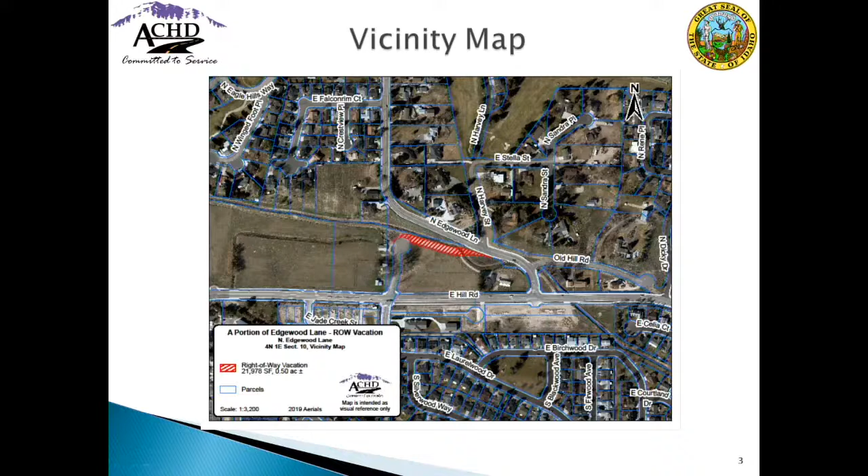This is a close-up view of the vacation. The vacation goes to the circle, which ACHD determined to be the terminus of Edgewood Lane at the time. It also contains, as you can see, a canal here, and some of this vacation includes property encumbered by the canal.

The appraised value of the vacation, excuse me, is $49,511.25. It is staff recommendation that the Commission adopt Resolution 2340 as submitted and vacate the property. I will remain standing for any questions.

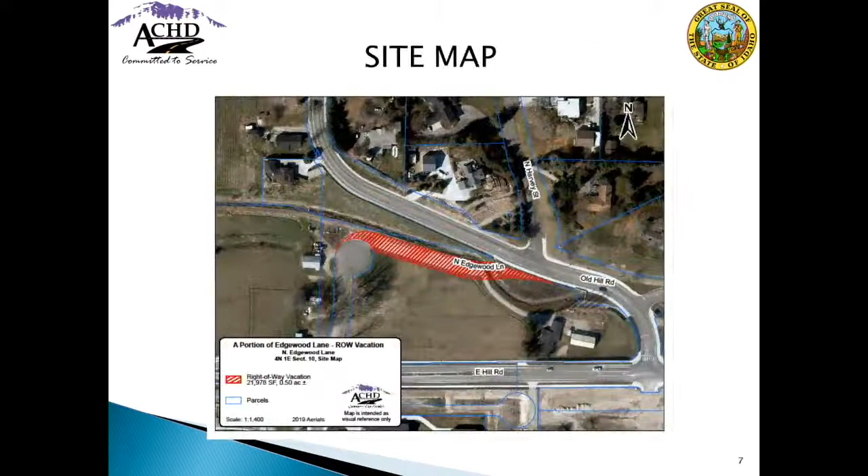Are there any questions of Mr. Serdar by the Commission? Mr. President, yes, just one quick question. The comment was made that the property was retained initially due to access required for the property that's there at the corner of Hill Road and Old Hill Road, I guess. The access issue, that's no longer an issue after the realignment of the road? Is that what we're dealing with? President Goldthorpe, Commissioner.

What the issue was at the time is we couldn't force them to take the property at the time and make them offset the cost of the property. Okay, so the people that are doing it now are the subsequent owners to the property. Okay, so access, after the realignment of surrounding roads, there were no access issues. It was simply a matter of this property being left over, the owner could buy it or not as they chose, and that's where we are. That is correct. Okay, thank you.

All right, are there any other questions? Any comments? Then this is a public hearing, and so we will now open the public hearing. Stacy, do you have anyone who is signed on to address us today? We do not have anybody signed up to testify. In that case, I'll just close the public hearing and put the matter in front of the commission for a motion.

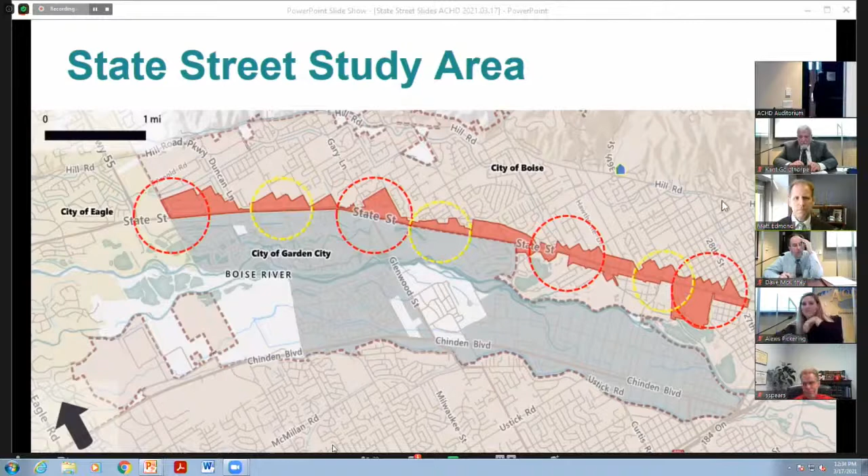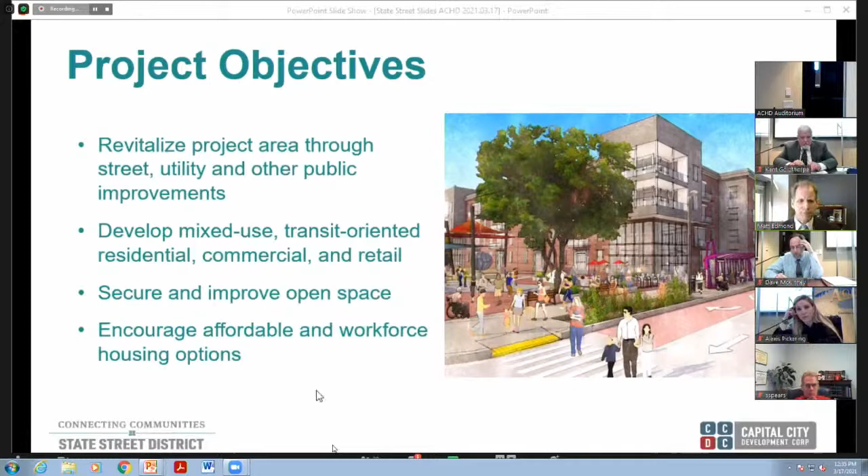So as part of our urban renewal planning effort, we commissioned SB Friedman to conduct a market assessment for the State Street study area. They determined that there's sufficient demand in the study area that, with urban renewal assistance, we would see this level of development in the next 20 years over the term of a 20-year urban renewal district: roughly 4,000 new residential units, either single family or multifamily attached, 50,000 square feet of office, and 362,000 square feet of retail, possibly a hotel.

So the role of CCDC in this: as Boise's urban renewal agency, CCDC employs 5 strategies to foster development, either through our own projects, through partnerships with other public agencies like ACHD, or public-private partnerships. These strategies are infrastructure, mobility—probably the two most germane to the highway district—as well as economic development, placemaking, and special projects.

First, on these strategies, I want to touch on infrastructure. The biggest one with regard to the highway district would be new streets, either perpendicular to or parallel to State Street. We seek to build these in coordination with development and approval of ACHD. The hope would be these streets improve access and circulation, create low-stress routes for walking and biking, and allow for improved access management on State Street, since it's a high-volume, high-speed corridor—the fewer direct access points, the better.

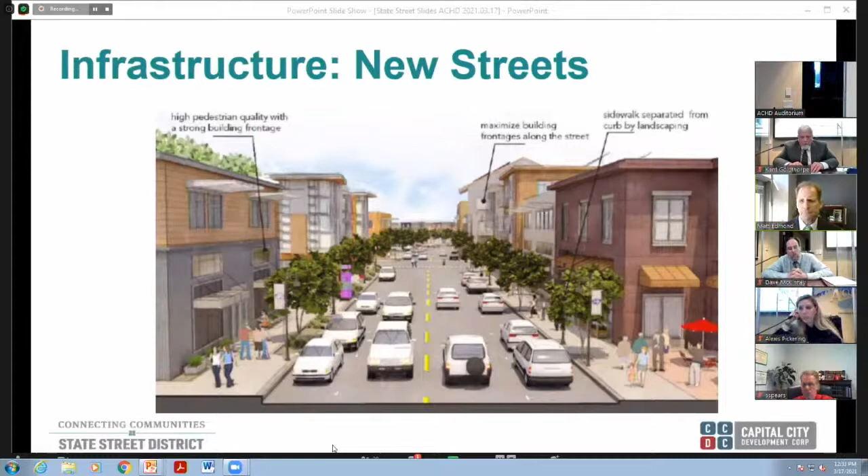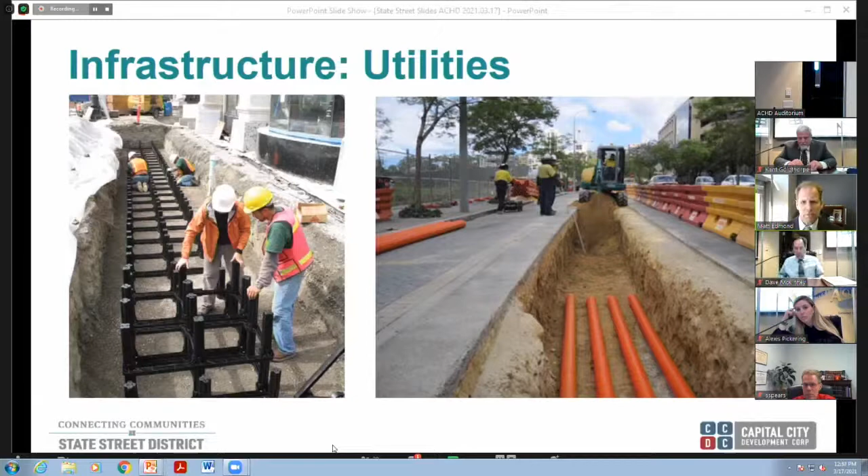Next, with regard to infrastructure, utilities. These are some of the things we've been involved in. On the left, you can see Silva cells, a type of green stormwater infrastructure. They help healthy tree root growth but can also be used for stormwater capture and treatment—we have them in a number of our streetscapes downtown. On the right, conduit banks, which we've started doing in concert with the city of Boise. If we can get spare conduit down major corridors, when a new telecom comes in, rather than digging a new trench and cutting into pavement that's possibly fairly new, the city, which has a master license agreement with ACHD, can just license that telecom to go into existing conduit. So it reduces the need for pavement cuts and hopefully improves broadband internet access and cost.

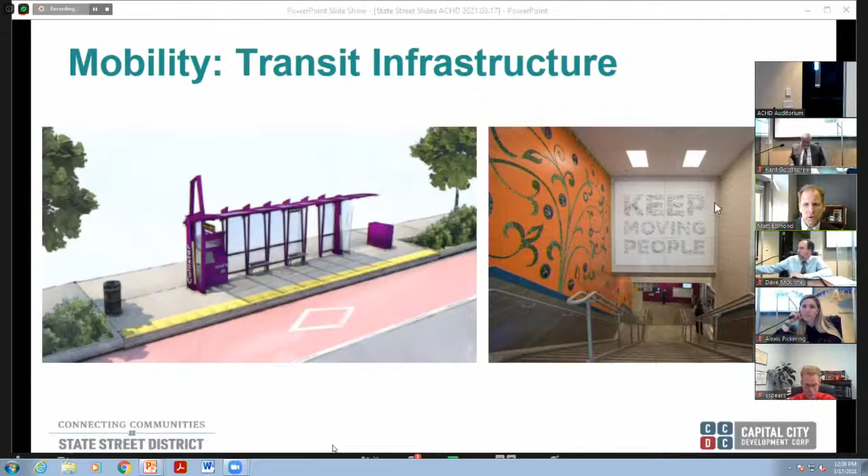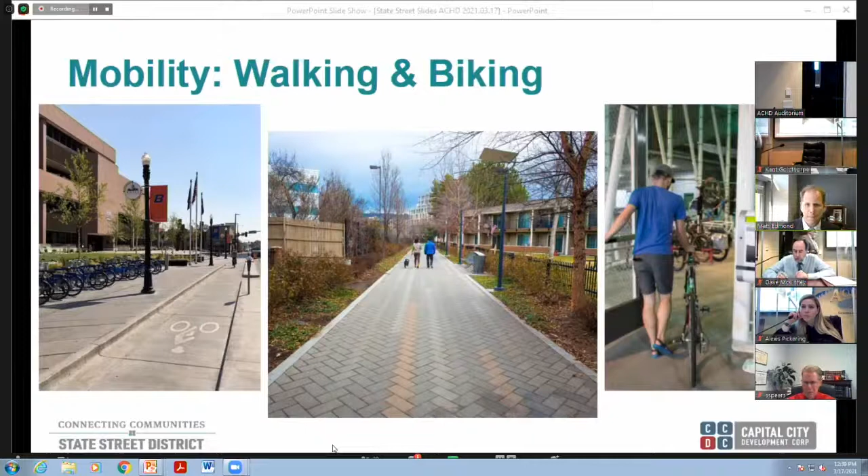And lastly, near and dear to my heart, parking. This may or may not include one or more parking structures along the corridor, depending on what we determine with our consultants.

I'll touch on the last three strategies real quick. Economic development: we generally pursue cultivating commerce and growing resilient, diversified local economies. We try to include components of affordable and mixed-use housing with these, and we can often foster development of properties that would not otherwise redevelop due to odd geometries, site contamination, or other challenges. You can see the Ash Street townhomes here on the left—that was a fairly odd-shaped parcel—and then the Water Cooler at 14th and Idaho, along with CCDC restaurant, on the right.

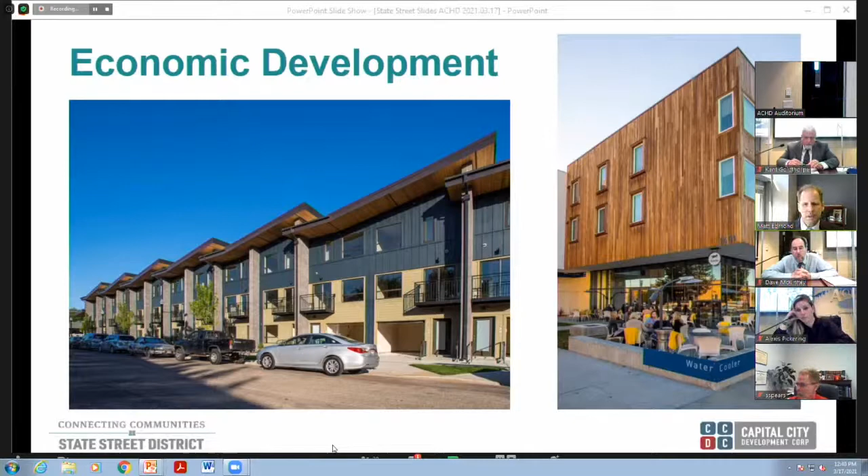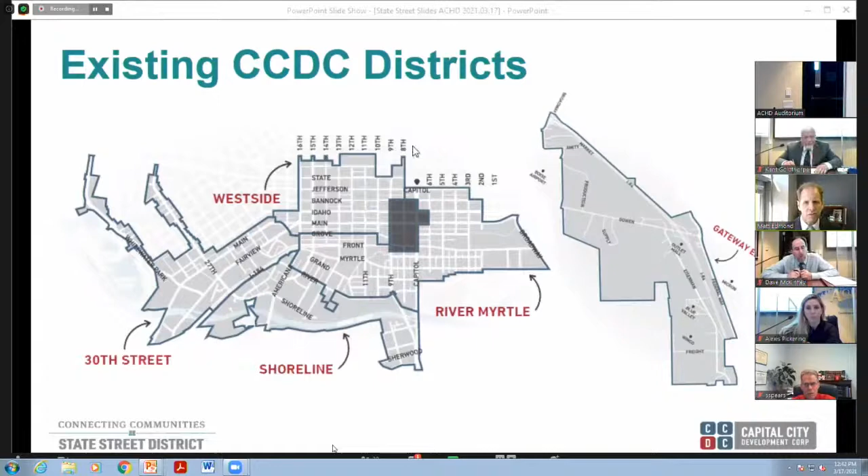So, process and next steps. This is what we've done to date and what comes next. We're currently developing frameworks and public improvement lists, and cost estimates to go with those lists, for a draft corridor framework.

Once we have a project list firmed up, including transportation elements, we'll reach out to ACHD staff to discuss a possible interagency agreement. In May and June, we'll seek input on the draft corridor framework, and we hope to have the fundamentals of any interagency agreement established, including that with ACHD.

We plan to take this to the CCDC board, currently at the July board meeting. Should they elect to approve it, we'll transmit it to the taxing districts, including a separate transmittal to ACHD for comment. If all goes according to schedule, the urban renewal plan would likely go before City Council for a public hearing in October.

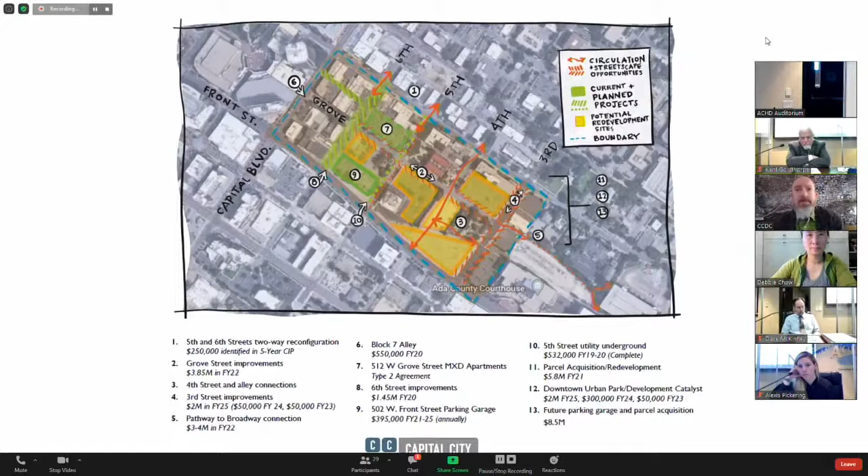Okay, so we're here to discuss one specific project that the vision report identified as a priority for public space and infrastructure investment, and that priority is the streetscape improvements on Grove from 3rd to 6th Street. This project helps accomplish the community's vision for the area by creating a distinctive shared street that will help celebrate the historic culture of the area, focus on multimodal transportation, explore sustainable strategies, and provide a venue for community events.

The project also takes into account interfacing with the multi-use pathway that would connect 3rd Street to Broadway, as well as a couple other ideas contained within the vision report and CCDC CIP. Other components of the project are utility infrastructure upgrades, green and stormwater infrastructure, inclusion of public art, and a distinctive Boise City Canal design feature.

ACHD staff are part of the stakeholder group, and CCDC will be re-engaging the stakeholder group at the end of March. Today, we're wanting to discuss what are the appropriate options for bicycle facilities so that we're communicating those options appropriately as we re-engage the stakeholder group and the public. And Debbie, I'll let you go ahead and hop into the bicycle facilities.

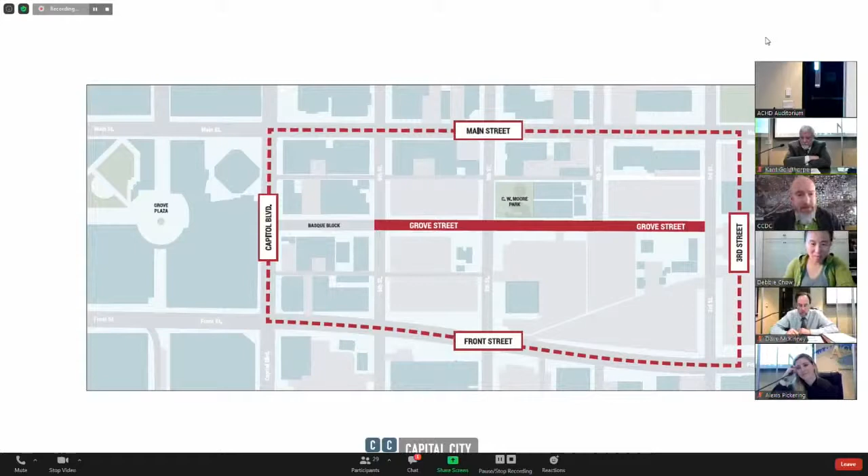Good afternoon, commissioners. I wanted to thank you for the opportunity today to talk about Grove Street between 3rd and 6th Street. And I wanted to show you a couple slides that show us what there is today and confirm some of our assumptions and how we move forward to design Grove Street between 3rd and 6th, and what's the role for Grove Street. Before you is the bike map, today's bike map from ACHD's website.

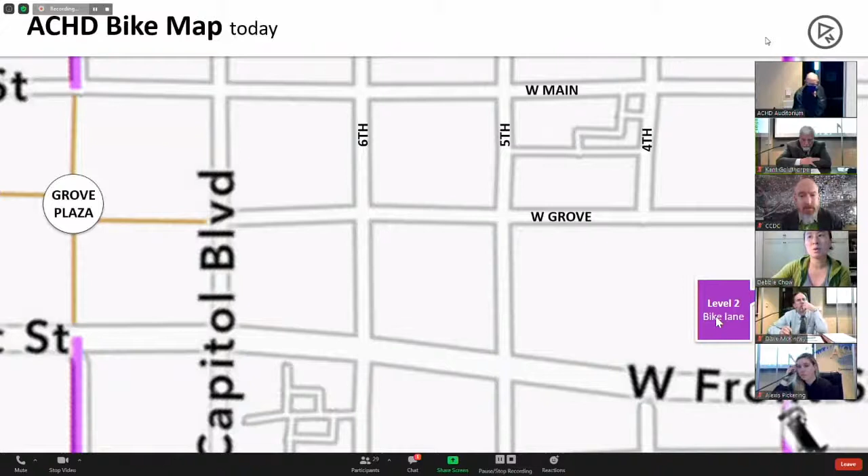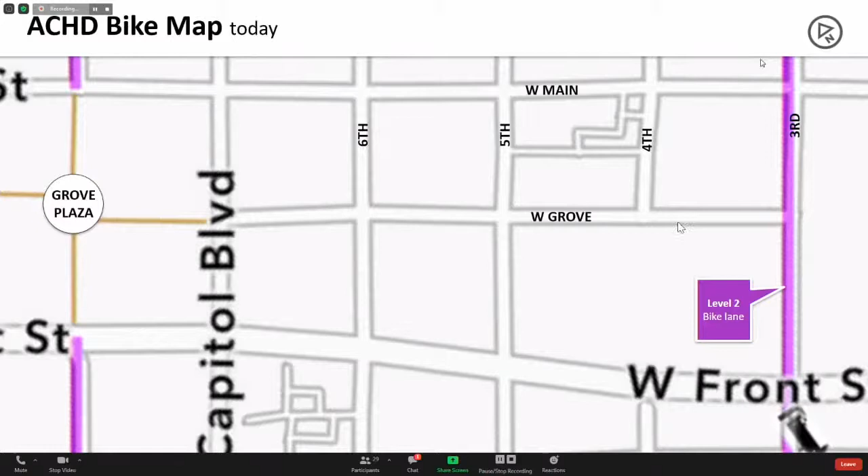What it shows is Grove Street is right in the middle. We have some purple bike lanes showing on 3rd Street right now, as well as on 8th Street. But there are no other current bike facilities in this area today.

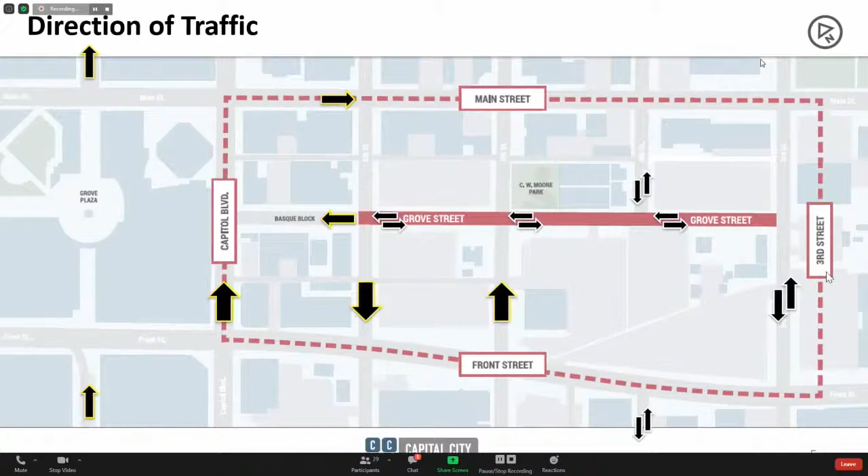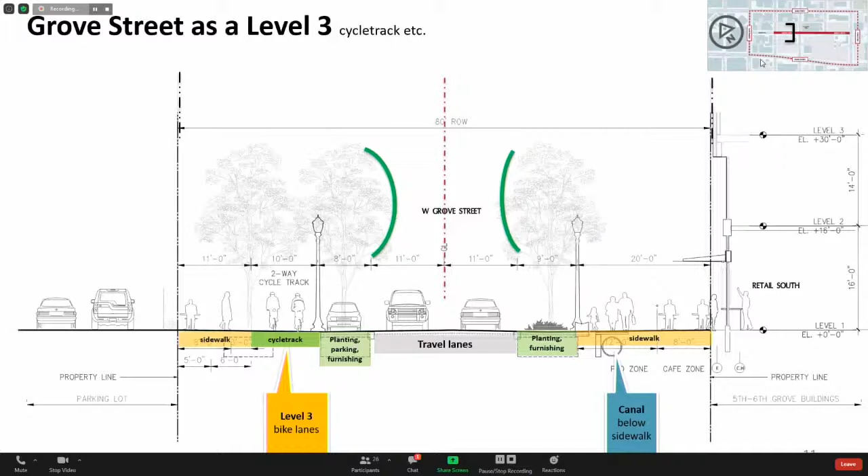And of course, looking at the first block, actually this block right here, where the Basque block currently resides. This is a one-way street, and we wanted to capture the current condition at the sidewalk level, but also on the north side, and also on the south side, but understand how Grove Street from 3rd to 6th will connect with the Basque block, and then come to the Grove Plaza if you keep heading towards the Grove Plaza.

Do you have any questions?

Yes, I have one. Is Grove Street a collector or arterial? Just as a pop quiz.

I'm curious because all I see is slow traffic on Grove. And so I think there's ways with traffic calming and other things to make Sharrows work really well if you wanted to go that way. I think it's a lovely area, and you're going to be able to definitely make it more of a place-making project than it even is now. So I'm interested in seeing how this moves forward.

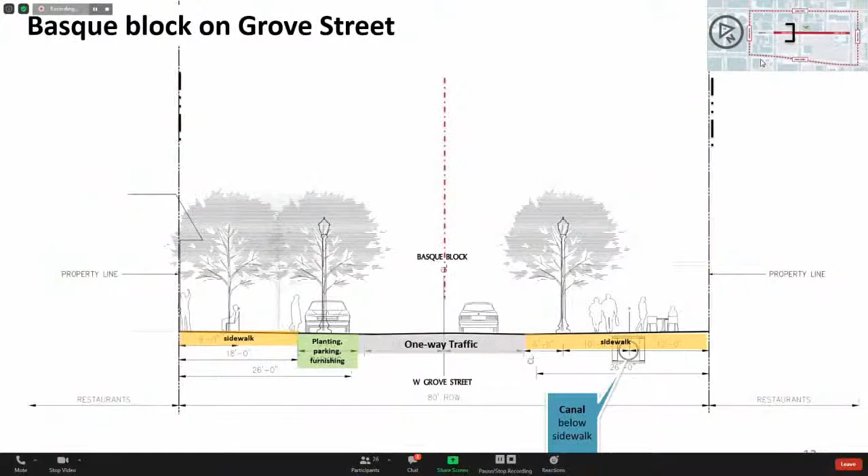Jack, do you want to? Okay, go ahead. Debbie, so you showed us on one end the Basque block. Can you show me again what Grove connects to on the other side, going east? And what those facilities look like?

So Grove Street on 6th, and right here is the Grove Plaza, Basque. So between 5th and 6th, between 4th and 5th, and 3rd and 4th. This is where the Department of Labor building is located. This is the Department of Labor Annex. There is a canal easement located right here. And Carl, can you speak a bit on this piece of easement?

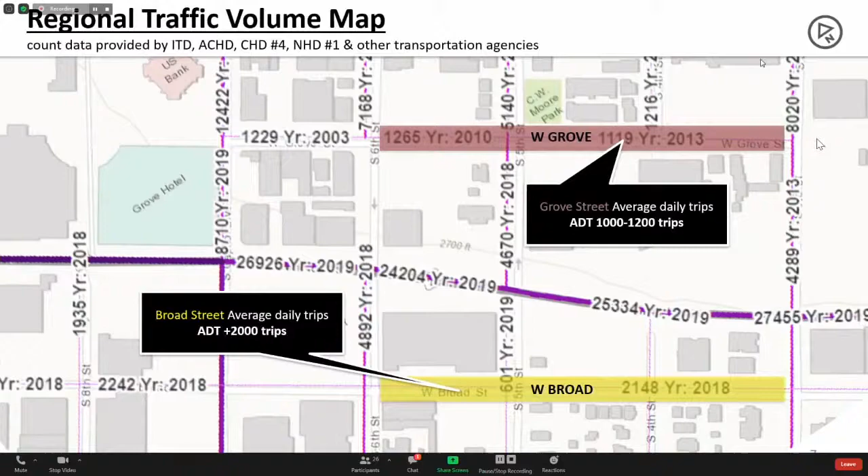So that's going north and south, and on the furthest east is 3rd Street, is that correct? Yes, this is 3rd Street. And 3rd, because I know they have great bulb outs and a few other pieces, do they have a Sharrow, or do they have other bike facilities?

Currently, there is a Sharrow from Google Maps that I can tell. But in the long run, from this ACHD addendum, it looks like north of Main Street on 3rd, this will remain as a Sharrow, and then south of Main, it's going to be a bike lane facility.

This is part of the reason why we wanted to come here and speak with you, is to confirm that between 2018 and now, 2021 - sorry, 2018, I'm traveling back in time - has any plan changed, or are the thoughts still the same?

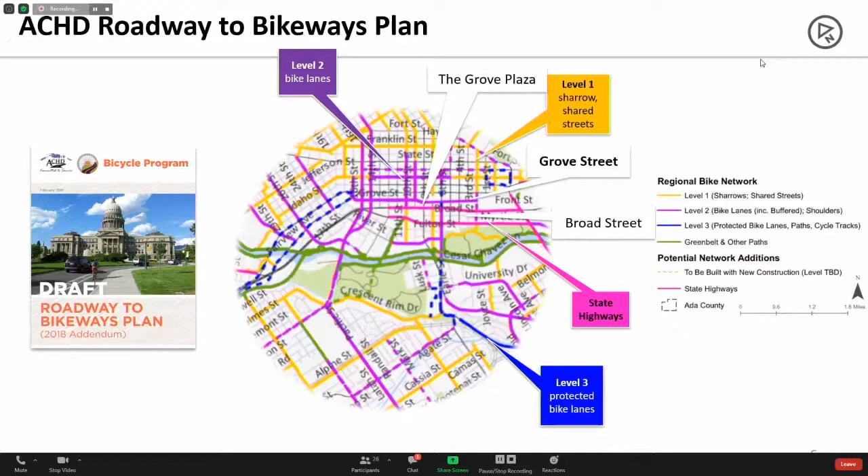And I want to show you a couple more, probably this is more brainy and more nerdy analysis here. We did a pretty in-depth analysis on the three types: there's the level 1 shared street, the level 2 bike lanes, and the level 3 two-way cycle track.

So what we did is take this 80-foot street and slice and dice many different configurations. Here's the center line of the street. The first one is what we saw: if we have an 11-foot lane, we have parking on either side, a 6-foot tree planting zone, and a 15-foot sidewalk. In every single one of them, you can see we have a consistency of where the canal is located, and that's one special feature we have, and we've heard from the community that's something they want to highlight, as well as the history component, for Grove Street.

So what we did here is flesh out all the possible scenarios. What we really want to get to is not a 9-foot sidewalk, but a much wider sidewalk space. But where there are areas where we can share the modes, we would. We wanted to come here to discuss with you what is the most appropriate way of sharing modes, and what's acceptable for ACHD, for the future of this segment of Grove Street between 3rd and 6th, connecting to the Basque Block and also to the Grove Plaza.

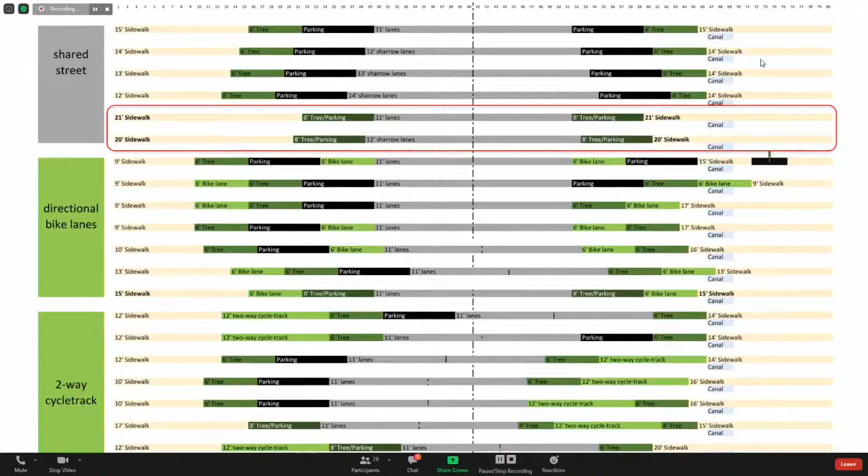Carl, do you have something to- Carl, before you respond, I'm getting a little bit confused. If you're here today to ask us for direction, we have people for that. The commission doesn't give direction for designs and stuff from the dais and work sessions. We just don't - we're not qualified, and a number of other reasons. If you'd like this street to look like 8th Street, then that's probably, after the designs are done and reasoning done and the city's behind it and CCDC, then you should probably come to us then.

But otherwise, this is all looking really great, but we're not professionals. Is that about right, Justin? Commissioner Goldthorpe, members of the commission, thank you. Justin Lucas, I'm the Deputy Director of Planning and Project Management here at the Highway District, just for the record. I think you hit it right on the head, Commissioner Goldthorpe.

We're glad to coordinate with CCDC on the options for this street. It is a local roadway. I think there's all kinds of options that can and should be considered, and typically, historically, on this type of roadway in a downtown setting, the Commission has worked with the Land Use Agency or the Urban Renewal Agency to find the best fit for the community. So I think looking at all these options today, there's lots of interest.

This map shows the Ustick maintenance site location. The property is this area right here in blue. As you can see, it's on the north side of Ustick and west of Ten Mile. Just to the north of us is the wastewater treatment plant. The land we acquired is vacant farm ground, essentially a blank canvas for us to use. In the southeast corner, there's a house on the facility, and as we're doing the site prep and building up the site, that will act as our temporary admin building.

Jennifer? Yes, ma'am. Is that the City of Meridian's wastewater treatment plant facility - is that what that is? Okay. Yes, it's Meridian. Okay, thank you.

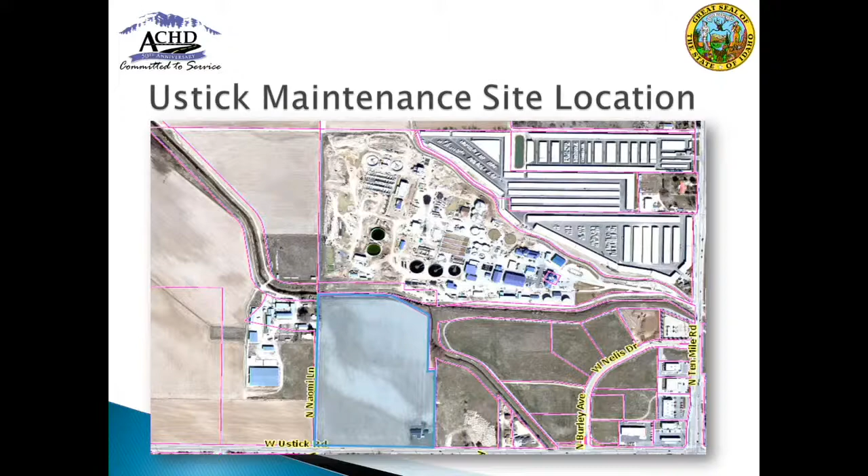By the way, there are trout in the creek at the north side of our property. Sweet, love that.

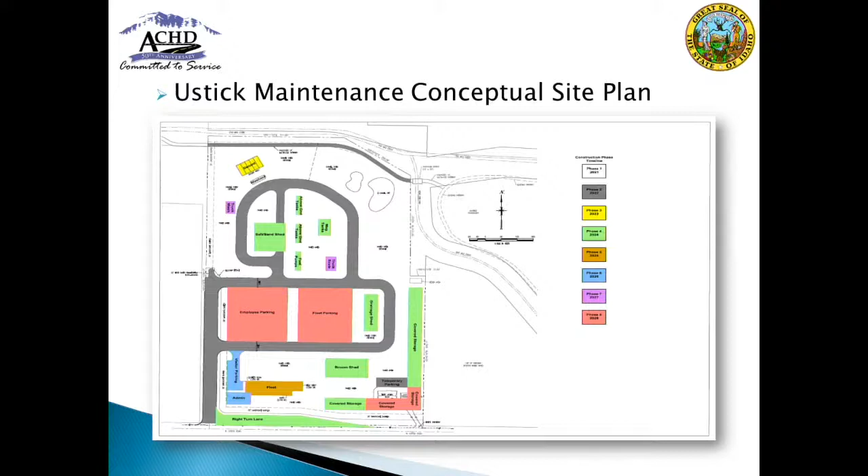So this is just an overview slide to show the conceptual site plan. This will be our proposed end state. I'm showing it to you all in one image here, and then I'll step through it in the next several slides. We phased it out. The colors represent each year of the development with a goal in mind for each of those years. This site plan is going to be submitted to the City of Meridian to start the rezoning and annexation process.

So the first phase is where we are right now, FY21. The goal in this phase is obviously annexation into the City of Meridian and rezoning for our uses. It's currently residential. We're in this part of the phase right now. Once that annexation and rezoning occurs, depending on where we end up this year, the plan is to get all that accomplished by this summer, then we can start connecting to city services and begin the design process, bringing on an architectural firm to start building this out based on our concept.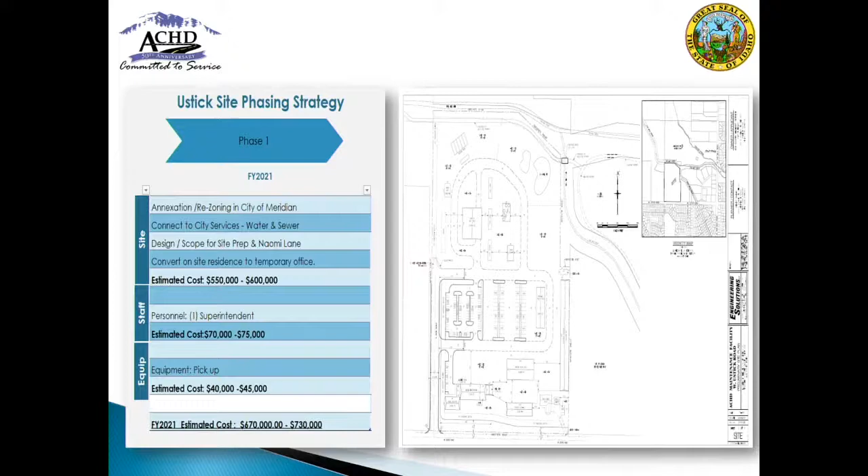I do want to take a moment on this slide. The very first goal we had in this phase was to bring on our superintendent of the Ustick Yard, so I'd like to formally introduce Heather Tillett, who's here. She is the superintendent of the yard. She's been instrumental in putting all of this information together. She's been doing a lot of research on decant facilities and what it's going to take to rezone. She's been working with our planner. So a lot of work since we brought her on in October, and her job is only just beginning.

So phase 2, this is when we're going to do the bulk of the site prep. The areas on the map highlighted in gray—primarily there's a road right now that connects to Ustick, that's Naomi Lane. It's a private lane right now, so we'll be moving that lane over to realign with the south portion of Naomi, widening it out a little, and building that site access road throughout the site. We'll also throw in a little temporary parking at the house. As I mentioned, that's where the admin building is going to be—a temporary operation until we build the final new admin building.

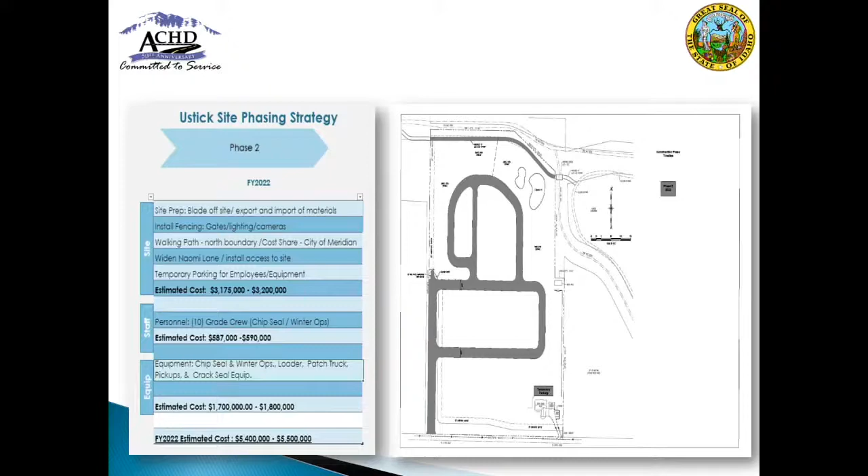I do want to make note on this slide of the cost of equipment. As we've been phasing all the equipment out, we're looking at the equipment we have now—equipment that would ordinarily be going to auction this year—and holding some of it back a little longer so we can phase it out over time. We're keeping equipment a bit longer so we're not seeing such a big push of new equipment as we're bringing on these new operations. We're really trying to balance that out to best use the taxpayer money.

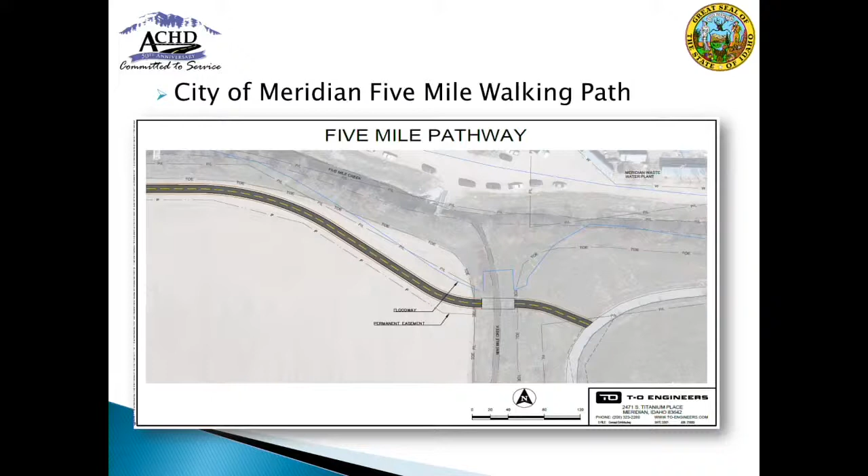Also in this phase, I want to point out that on the north end of the property, there will be a pathway put in. This is in concert with the City of Meridian—they're developing a Five Mile walking path. They want to do a cost sharing, where we'll take some of the burden of building that lane and they'll take over the maintenance over time. So it's a good partnership with them, and the timing aligns well since they want to begin their construction in 2022.

Jennifer, one thing I'll make the commission aware of—when I was on Meridian's Parks and Rec Commission, it became very apparent, and I was very grateful for this, that anytime property was developed, that was the way the City of Meridian preferred to do pathways.

This is our good neighbor policy here. When we completed years of surveys, focus groups, and public meetings, it was determined that by a huge majority, the very first and foremost priority for the citizens of Meridian, what they wanted to see more of than anything else, was pathways. So this is a good thing.

And as I said, the timing is good, so as we're building that up and putting up our fence line, we'll put the fence to the south of the pathway so that they'll have that access, a green belt of sorts for Meridian.

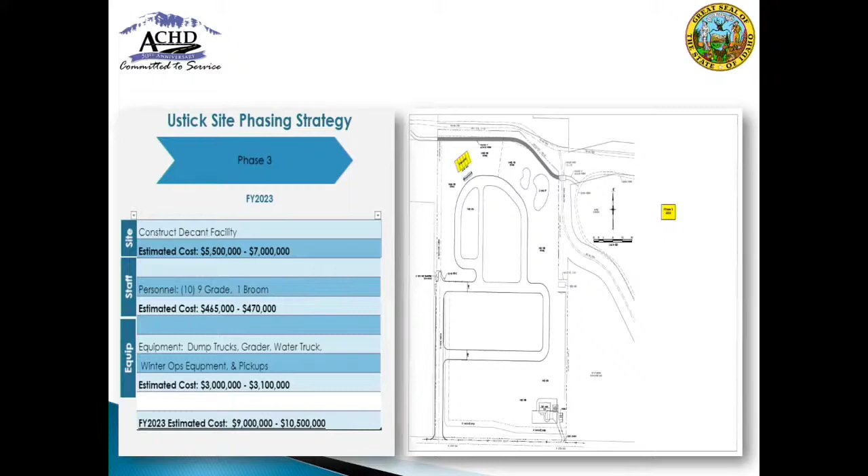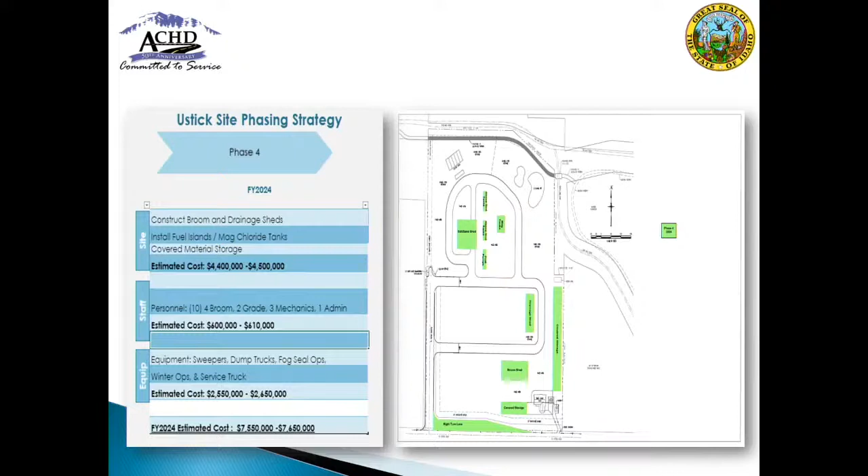In phase 4, this is when we're going to be constructing a good number of the facilities on the site. So the broom and drainage sheds would be coming in, putting in the fuel islands, the mag chloride tanks, and covered material storage. During this phase for staff, we'll be starting to bring in a little bit more of the broom crew, tying up some of the grade crew, bringing in mechanics and an admin. The equipment, again, is just starting to fill out a little more. So a big year for sweepers, bringing in more dump trucks and the associated winter ops equipment, and the fog seal operations.

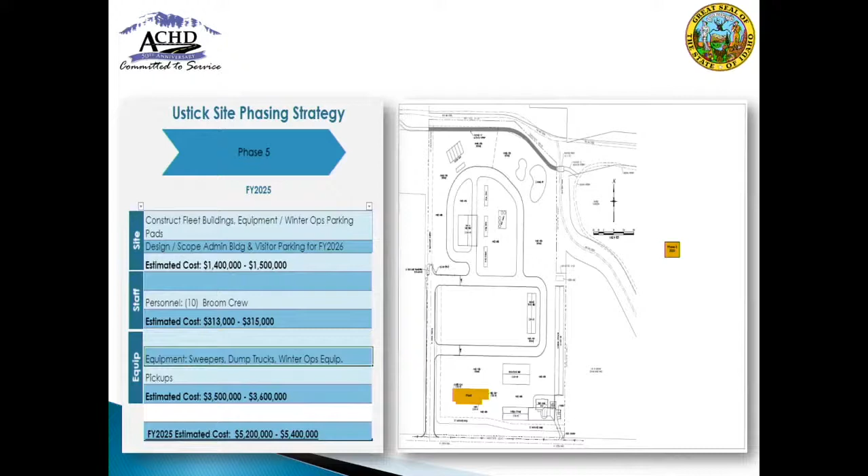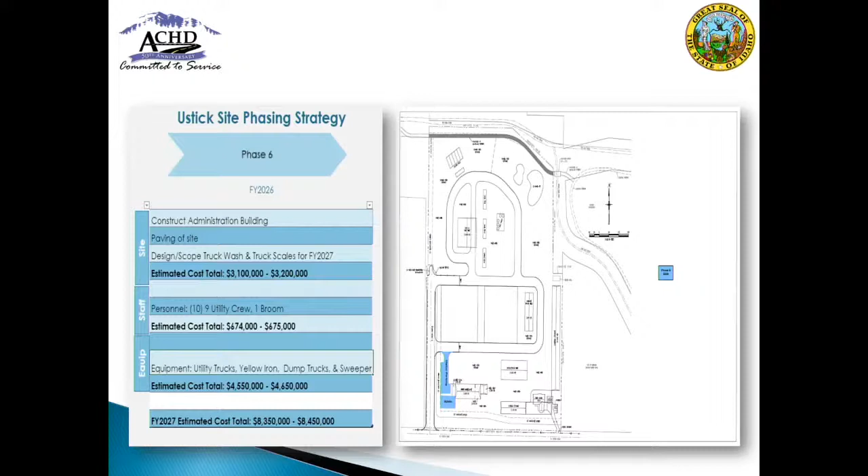The 6th phase, this is our admin building construction. We'll bring in the visitor parking, build the admin building, pave the site. We start some design for some of the other future things also. For personnel, our big push this year is the utility crew, so we'll be bringing in the bulk of the utility crew and another broom crew and their associated equipment.

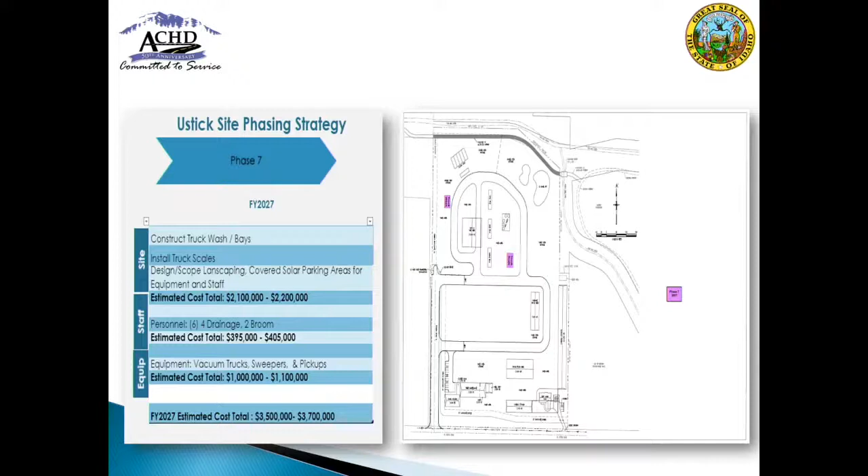One of the things we're going to try to achieve here, and more plans will be coming as we flesh it out, is creating this site as a net zero green site as best we can, using our resources wisely. For this parking area, we're proposing bringing in covered solar panel parking, so we can establish our own electricity as much as possible, minimize the impact on our environment, and be a net zero facility.

There are a lot of examples of this already in Treasure Valley that we've been able to go out and talk to, so I think there's good opportunity there, and we'll obviously have to do the cost benefit analysis to see if that's the direction we want to go. Also in this phase, if we choose to remove the administrative house that's on the facility, since we now have the new admin building built, we could remove that facility and add covered additional storage in its place.

For personnel, we'd be bringing on the vegetation crew, four members of the vegetation crew, and another broom with associated equipment for the vegetation crew, some bucket trucks, etc. So bottom line, this is the 8th phase, this is our last phase. Over the 8 years, when we're adding up all the additional costs, we're looking at somewhere in the range of

$45 million for all of the site prep, personnel, and equipment. So we recognize that that's a sizable chunk of money. It is an impact, and as was alluded to earlier today, anytime we're going to be developing any new site, that's pretty close to a price tag that we'd be looking at for each of the sites. I had the estimated total cost for site preparations, and you could probably use that to extrapolate if we had to do another site to move the Adams Yard.

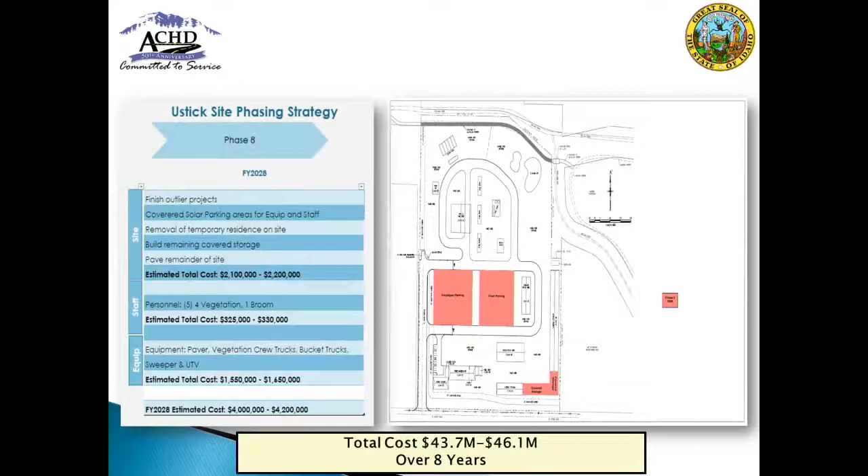Jennifer, I have a question. Yes. So with the pathway being on that north side of the property, if I'm reading that correctly, further down in the phases, and then that last phase, I would also be really open to making that fence line accommodating with trees, so it's not a barbed wire fence, and make it look really nice. Yeah, and we'll have some plans for definitely along the frontage area, the landscaping. It'll look nice for the application with Meridian.

On the back side, they've already mentioned that they need to be able to see through the fence line just for safety of the pedestrians on the pathway. And we will look to see what we can do for what's in our property line versus what they're going to be doing for the landscaping on that end. And I love your diving into seeing how we can make the property more efficient and sustainable. I think that's really, really important. Thank you. Thank you. And the good news is the cost to do that's going down.

Okay, and Gary is here to talk about the Franklin site.

President Goldthorpe, Commissioners, for the record, Gary Inselman, Deputy Director of Development Technical Services, to provide you an information briefing about the proposed Franklin Traffic Operations Yard. We call it Traffic Operations Yard, but it will house more than just that as proposed. Currently, the traffic operations crews consist of our signal construction crew, signal maintenance crew, our signal inspectors, paint crew, and sign crew. We would also propose to move congestion management out there, including our traffic management center, which is currently housed across the street in the traffic operations building.

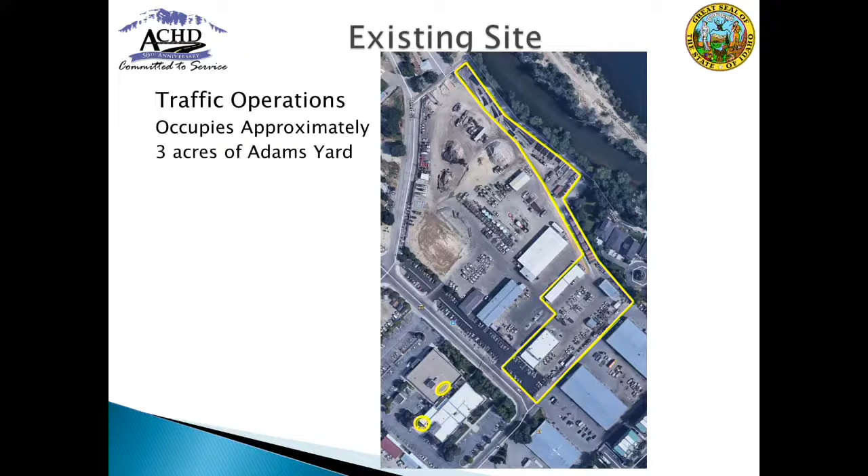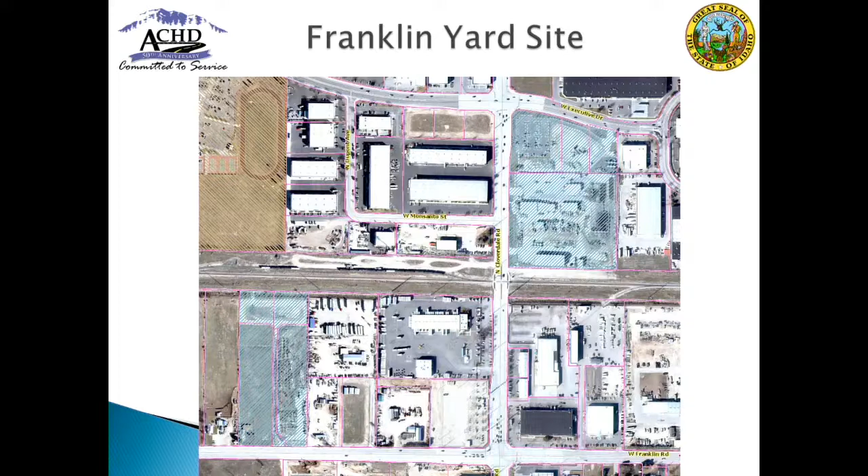The bottom left is the parcels that we acquired. Commission authorized us to enter into the sale and purchase agreement in October 2019, and we completed that sale a little over a year ago in January. In the upper right is our Cloverdale maintenance yard. So we'll utilize our fleet services facilities there, mechanics and fueling stations, so we don't need to duplicate those facilities at the Franklin site.

Zooming in a little bit, we actually bought two parcels side by side. They're separated down the middle by an access road to one of our existing stormwater basins at the northern end. Interestingly, the parcel on the left was in Meridian's impact area, and the parcel on the right is in Boise's impact area. So last year during their comp plan amendment, the city of Meridian agreed to release that parcel and allow it to be annexed into the city of Boise. So we will be working through the city of Boise for annexation, rezone, and development of the site.

Gary, go back to that previous slide. The parcel on the right, what is its current use? Its current use is it's vacant. It was leased to a landscaping company, and they've since relocated when we purchased the parcel. Okay, and then the parcel on the left appears to have a home on it? It did. We had that removed. It was not habitable.

Mr. President, Gary? Yes, Jim? You'll probably get to this, but that property to the north that borders on the railroad, would we have to provide access to that across the middle of our property? Mr. President, Commissioner Hansen, no. The parcel to the north here is owned by ACHD. It's a stormwater basin, and with the drain and the railroad, there will not be any public access to that area or crossing.

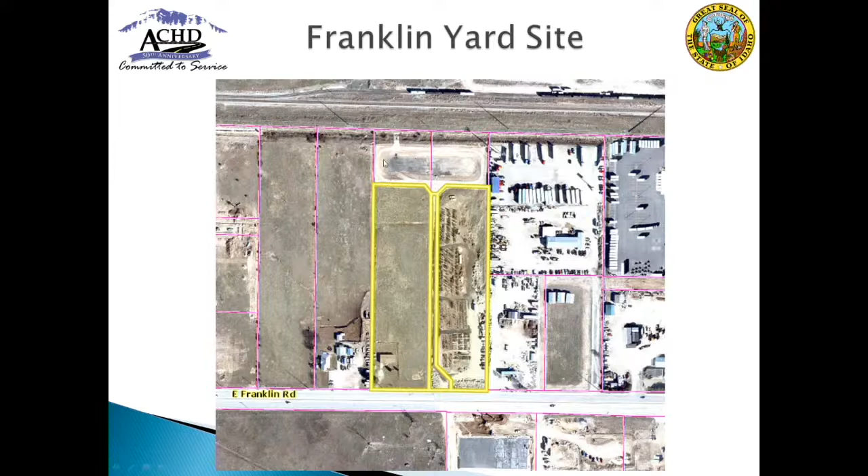It's about a parcel or two away from us currently. I believe the second parcel to the west is under development, and the parcel to the west of us is currently privately owned. So when that develops, they would connect that roadway, and we would have access out to Eagle Road going out by R.C. Willey, or to the signal at Franklin and Touchmark using Lanark Street to the west.

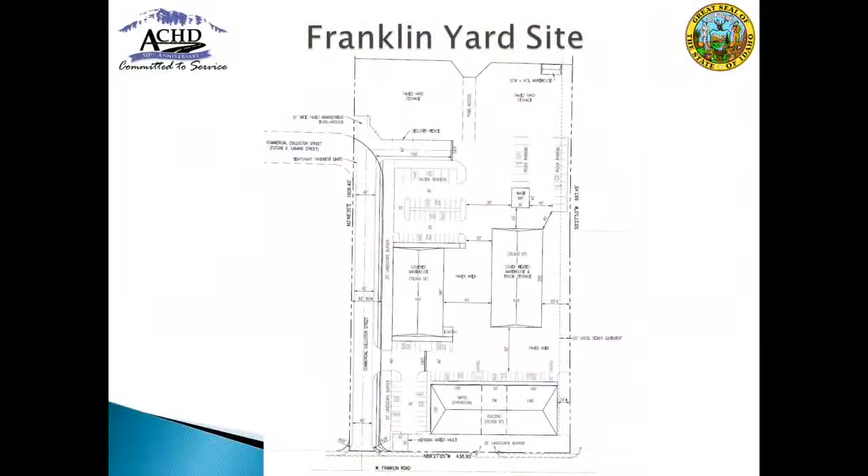Gary, sorry to interrupt you. How many acres total are these two, is this entire site? Mr. President, Commissioner Pickering, it's about 7.5 acres. Okay, thank you. How does that compare to our current site that we're taking operations from and moving to? Mr. President, we own about 11.5 acres across the street for the whole Adams Yard, and traffic operations occupies about 3 acres of that.

Currently, the reason for a heated warehouse is we have materials that can't freeze, so we have to store our paint and other materials in a controlled environment, as well as our paint striper trucks. We currently house them in the broom shed, where a striper takes the space of 2 sweepers. A few years ago we had to lease additional space off 38th Street, where we have room for 5 or 6 sweepers and 2 mechanics, because there's not room for all of us in the buildings we currently have across the street.

So phase 1, as Jennifer stated, for the Ustick site, we're proposing to go through the entitlements and design. We've been working with a planner on the site plan, and we'll have our pre-application meeting and neighborhood meeting with the City of Boise in the coming weeks. The schedule will be about the same, completing that process through the city by the end of July. At that time we proposed to engage architectural and engineering services to design the site and the buildings and begin that process.

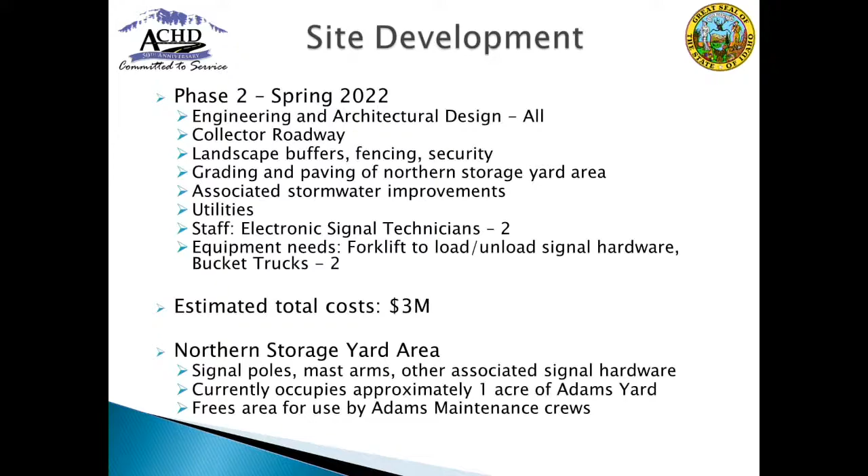We are proposing 2 additional electronic signal technicians. It's not necessary because of the site, it's necessary because of the size of our system and the number of signals we have. FHWA guidelines recommend 1 technician per 40 signals, and we're currently at 1 per 90. So I'm proposing 2 additional technicians this year, and 2 years later another 2, along with the associated equipment.

So again, that would be this area. Gary, this isn't related to that last slide, maybe it's spilling over into Jennifer's presentation, but how many vac trucks are you guys thinking about purchasing or need? Two? Okay, thank you.

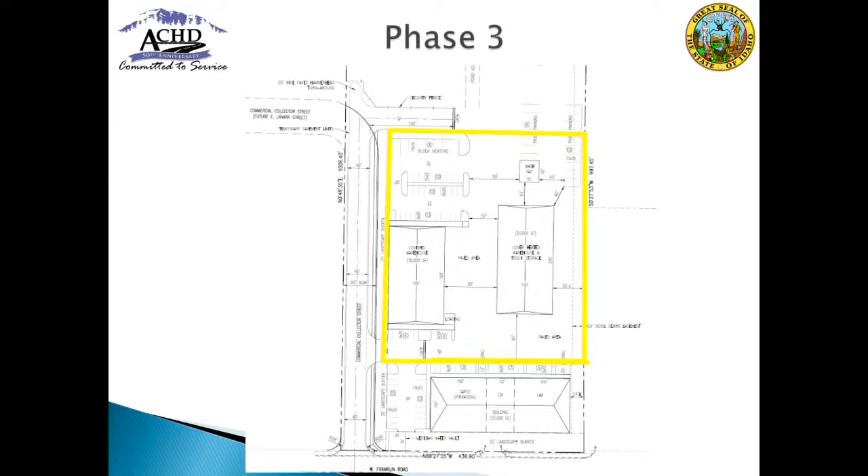Phase 3, we'd propose the middle portion of the site: the warehouse building, the heated warehouse building, and the small building to the north, which is a truck wash bay. We'd also do the associated grading and paving of the yard and parking areas.

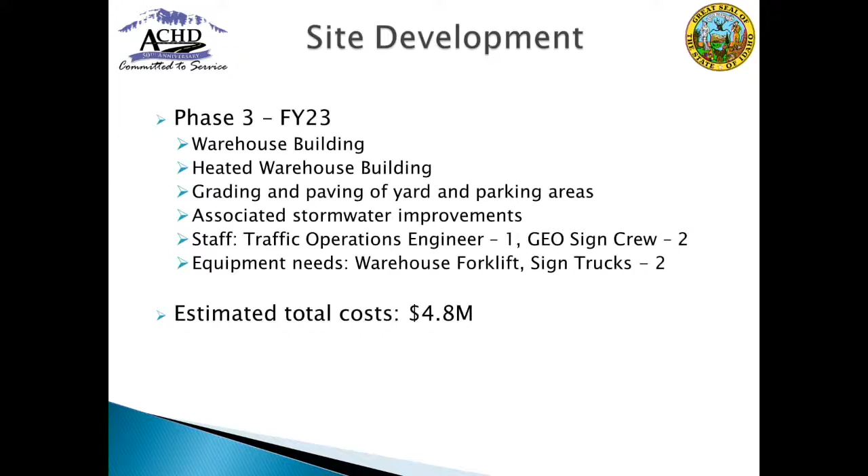Also, not related to the site but to the growth of our system, the addition of a traffic operations engineer for congestion management. They're the ones that time and program the signals. When we worked on the upgrades earlier this year with the school flashers and that new technology, they were instrumental in that as well. And then the addition of 2 GEOs on our sign crew and the associated equipment. So again, that's that area of the site.

Finally, phase 4 would be the building for traffic operations, the traffic management center, congestion management space for the traffic operations engineers, and then our construction lab.

Gary, can you explain a little bit about what the construction of these buildings is going to look like? Are they going to be brick and mortar, or pole buildings? What's your thought process?

Mr. President, Commissioner Pickering, the office type building would be more or less this type of construction. We can get into details of the materials when we're working with the architect and design review committee with the city. The warehouse buildings, I'm imagining, would be more of the steel type buildings. We'd have to work with the architect and the city on what they require, as well as what would be most economical and useful for our purposes.

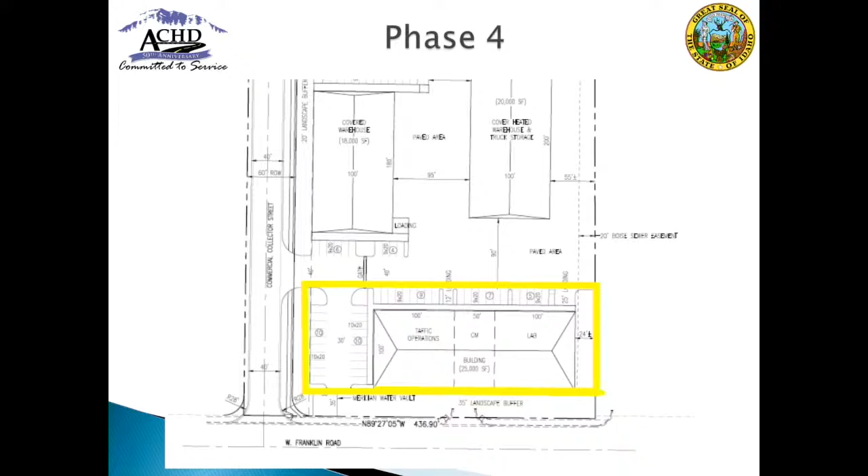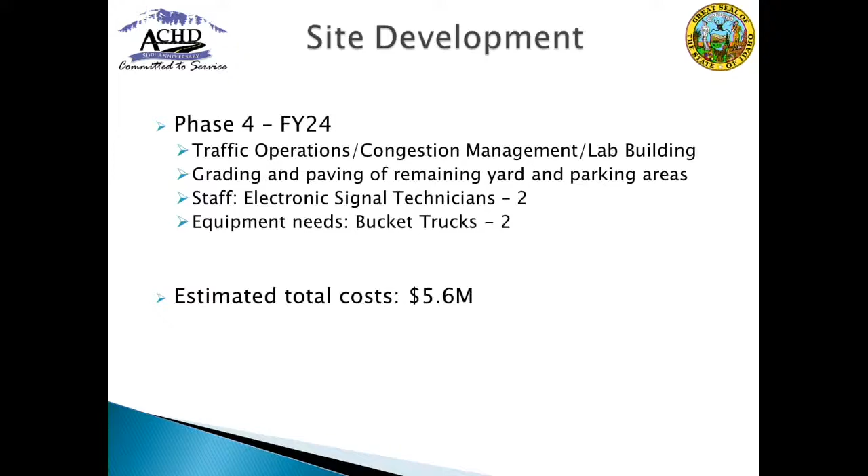Okay, again, finally that phase 4, the office type building, finishing off the remaining little parking areas along that building, and then those 2 additional electronic signal technicians I mentioned before, and the 2 bucket trucks that they would require. So bottom line, over the next 4 years, we'd be looking at approximately $13.5 million for development of the site, the buildings, the additional cost of the

7 personnel and associated equipment. And again, as with Jennifer, the next steps is to complete that annexation and zoning process, and we anticipate being done with that by the end of July. So I'd be happy to answer any questions you may have.

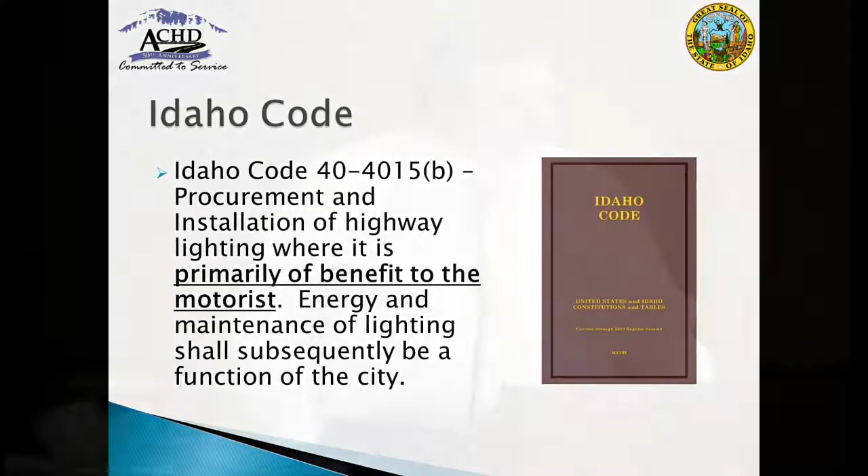The first thing to remember when we talk about street lighting is what Idaho Code says ACHD is required to do. It states in Code 40-4015B that within city limits, ACHD is responsible for the procurement and installation of highway lighting where it is primarily to the benefit of the motorist. It then goes on to say that the energy and maintenance of lighting shall subsequently be a function of the city. So we put it in with our projects where it's primarily to the benefit of the motorist, then the city takes over ownership and maintenance. That is true even of street lights on our traffic signal poles - those are maintained by the cities.

We have two sections in our policy manual that relate to street lighting. The first one is 5106, roadway lighting, installations by ACHD. We have a couple categories where ACHD takes the lead in street lighting. The most familiar would be capital projects. With our capital projects, we put street lights at public street intersections. We also put them at enhanced crosswalks, such as RFBs, whether those be at intersection or mid-block. ACHD will also install street lighting at roundabouts and on major bridges, such as the East Park Center Bridge over the Boise River.

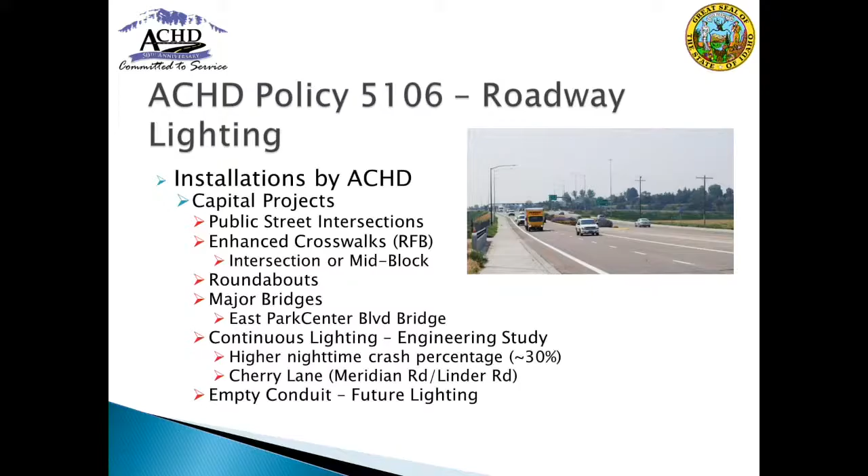For continuous street lighting, ACHD will look at an engineering study to determine if that is needed. One of the main things we look at is if we have a higher nighttime crash percentage, approximately 30%. If so, then we will look at installing continuous lighting. A recent project is Cherry Lane out in the city of Meridian, from Meridian Road to Linder, where we installed continuous street lighting. In the event we don't install continuous street lighting, we still install empty conduit along both sides of the street on our arterial widening projects for future lighting if the city ever wants to come back and install it.

A couple other locations where ACHD will install street lighting is after a safety investigation, such as a rural curve that may have a run-off-the-road incident problem where it's just dark, such as Orchard and Lake Hazel. Or we get requests for rural school bus stops, sometimes out off Pleasant Valley or Kuna Mora or somewhere along there where there's no street lighting, but the school bus will stop there - we will install a street light.

So Sean, can we not install lighting until after an accident has happened, or can we do it preemptively if there's a dangerous curve like that? Mr. President, Commissioner Pickering, like the Orchard and Lake Hazel project, we actually put that in with the project because we knew it was going to be dark with a higher likelihood of accidents or running off the road, and it has been - we have lots of run-offs at that location.

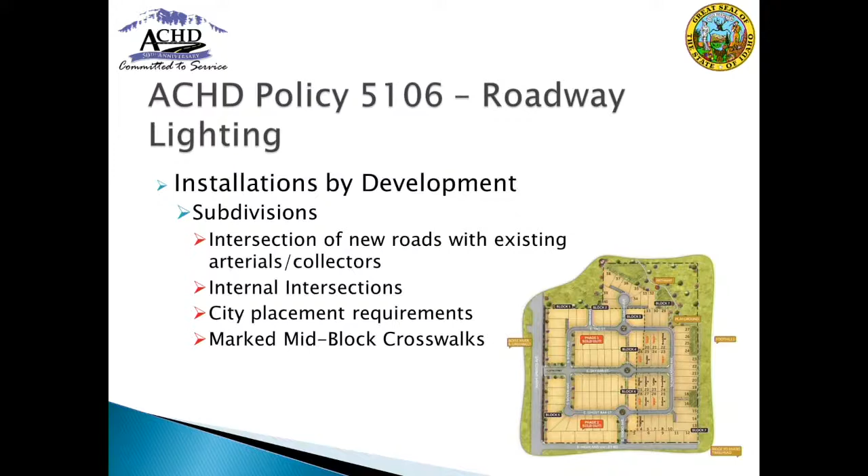Our second policy section that covers street lighting is 5107. It talks about our roadway lighting design standards. The basis of our design guidelines are two documents: an IES publication called The Recommended Practice for Roadway Lighting, and an AASHTO publication, Roadway Lighting Design Guide.

Some street lighting basics: no one size fits all when it comes to street lighting. It must be designed. I can't just say here that we're going to put street lights every 500 feet. Every site is different. Street lighting supplements vehicle headlights. Typically, vehicle headlights are good for your low volumes, your 25 miles an hour, but beyond that, you need to have something more to be able to see the further distance.

Street lighting helps identify conflicts at intersections for all users. I said in the beginning that while we install it primarily for the benefit of motorists, there are other benefits that come along with that for pedestrians and bicyclists. When we install them at intersections, that's where we have the conflicts with all users.

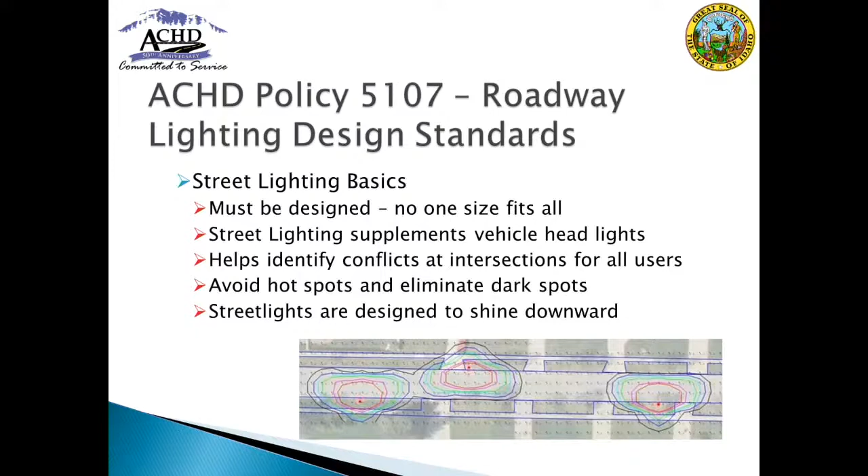We try to avoid hot spots and eliminate dark spots. Too much street lighting is not good, and not enough street lighting is not good. You really need to have that happy medium. Street lights are designed to shine downward, not upward. Some pedestrian scale lighting can actually get upward lighting, because where typical street lighting shines down, the pedestrian scale light will kind of shine more upward.

Some street lighting considerations: we consider in our guidelines pedestrian activity. We try to have a front light at our mid-block crosswalks, such as an RRFB. So we have a pedestrian light or pedestrian luminaire about 30 feet, approximately, in front of the RRFB. That is to help the visibility of the pedestrian.

Street classification - we have different standards for arterials, collectors, and locals. Intersection spacing certainly comes into it. Since we do place street lights at all public street intersections, the closer the street spacing would be, the more lights we're going to have.

Pole height - typically on arterials we try to install a 40-foot luminaire, and on collectors and locals we have a 30-foot luminaire. When you do go to the shorter height, though, you end up with additional poles. So it's a trade-off.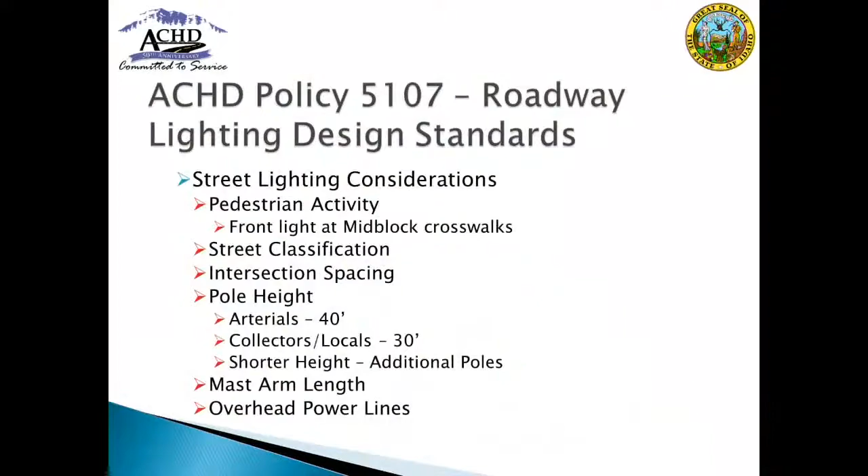And would that, sorry, another question as I'm thinking it through - would that need to be part of the integrated 5-year work plan, or is it less formal? Mr. President, Commissioner Pickering, something like that where you're just talking about one intersection, those can just be sent to the traffic department through TELUS or through your commissioner, and if the work gets back to us, we'll go out and take a look at it and see if it's needed, and then we'll try to find a way to get it done. It's typically pretty easy.

And that was the last slide anyway, so.

Great, are there any comments or questions for Mr. Martin? Sean, thank you. I'm sorry - you're fine. Sean, you mentioned downward lighting, and that's why I'm asking - it seems like there's a ton of new technology coming out with more efficient lights that give out the right light, don't blind folks, and help prevent light pollution. What's your philosophy about incorporating more of these up and coming lighting options?

Mr. President, Commissioner Pickering, you're right, it's always changing. I remember when we first started here, everything was high pressure sodium, and now of course everything's LED. So we do look at new technology as it becomes available. We try to pick lights that are off the city's list, because since cities do take over maintenance of those, we try to take the ones they want. So we work with the cities through that process as well. We're happy to look through new technologies, always being careful not to be in the front of new technology - I like to be somewhere in the middle. I don't want to be too far lagging, but I also don't want to be the one taking all the risks either.